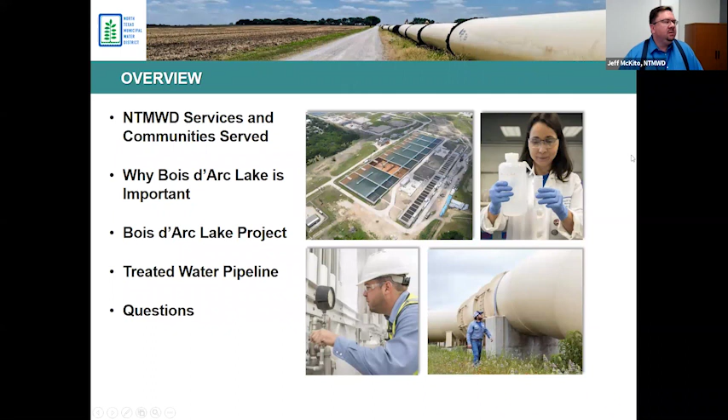So let's talk a little bit about NTMWD and the services that we offer. First of all, we serve up to 80 communities, 75 of those on a daily basis and 5 as needed. That's a service area of about 2,200 square miles in 10 different counties here in North Texas, and 1.8 million people currently receive water from us.

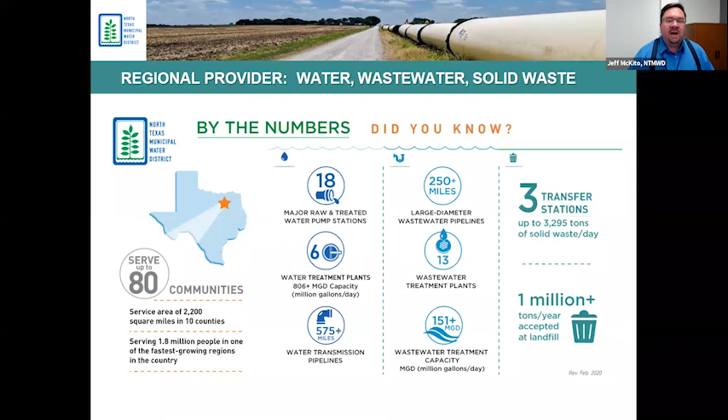But that's not the only service we provide. We also provide wastewater services to 1.3 million people, and we provide solid waste services to about 900,000.

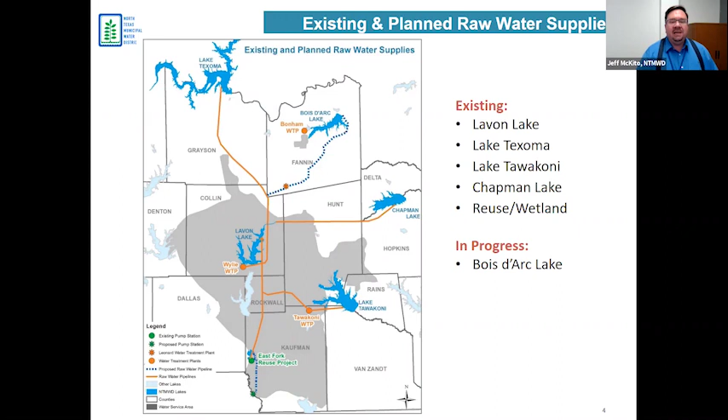So why do we need to build Bois d'Arc Lake? Well, really, it's all about population. When the district began providing water in 1956, we serviced 30,000 people. Today, as I mentioned, 1.8 million, and as you can see by this map, by the year 2070, that number is expected to more than double to 3.7 million people.

Our service area includes some of the fastest growing cities in the country, including Frisco and McKinney. We also service Plano and Allen. The Collin County communities are really growing. In fact, Bois d'Arc Lake will only provide us reliable water until the year 2040, and we will need to find additional sources after that to keep up with the growth in our area.

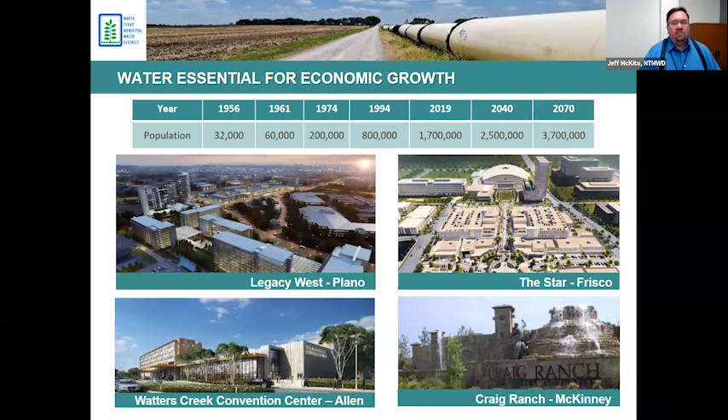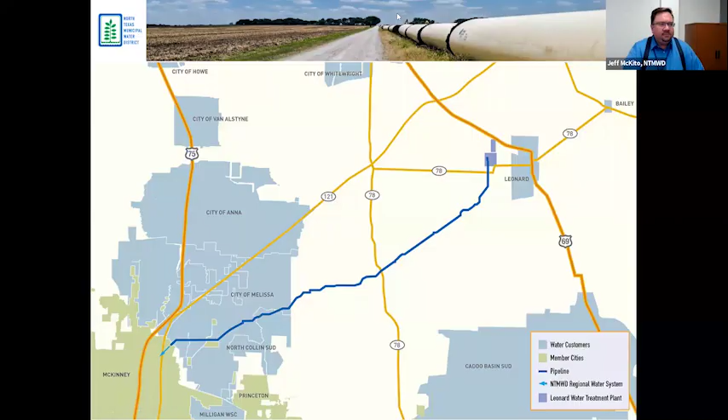So what is Bois d'Arc Lake? It is the first major reservoir that's been constructed in Texas in 30 years, and it's about 16,600 acres. It's got a firm yield of 108 MGD, similar to Lake Lavon, a little bit less, but similar to that. North Texas is the owner and operator.

The cost estimate that you see here, 1.6 billion, is for all of the components that we'll talk about. I know that y'all are here for the treated water pipeline to discuss that, but in this particular case, we're going to go ahead and I'll review the entire program.

Construction began after we received both permits. I'll talk about that in a little bit. It began in 2018. We anticipate starting to impound water in late 2020, with ultimate delivery of treated drinking water to our service area in the spring of 2022.

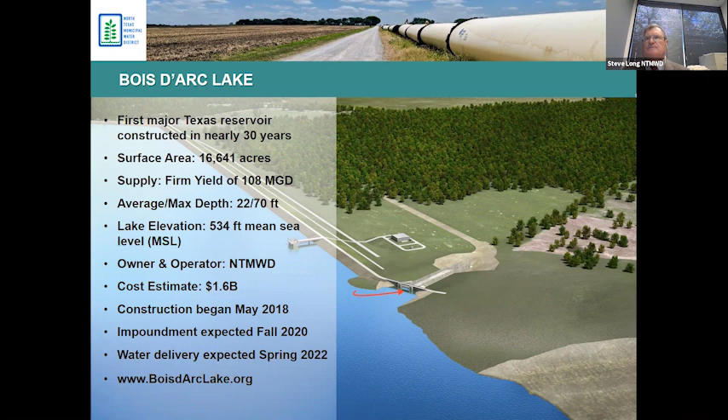Okay, so this is an overview of the project. As you can see, it's a very long project. It starts at the northeast corner of Fannin County and goes all the way to the city of McKinney.

The first area we want to talk about: we organized this project based on work type. We have heavy civil earthwork - that'll be Archer Western doing the dam, reservoir clearing, and the Leonard Terminal Storage Reservoir. We have Resource Environmental Solutions, and they are going to do the mitigation. We purchased a 15,000 acre ranch, Riverby Ranch, and we have some upstream mitigation sites east of Bonham. So Resource Environmental Solutions will be our major contractor for that part of the project.

The next part is the heavy mechanical - that'll be the raw water pump station at the dam, the Leonard Water Treatment Plant, and the Leonard High Service Pump Station. Garney is that major contractor. For the roads and bridges, we contract with Austin Bridge and Road. Garney also will be doing the raw water pipeline and today's topic, the treated water pipeline.

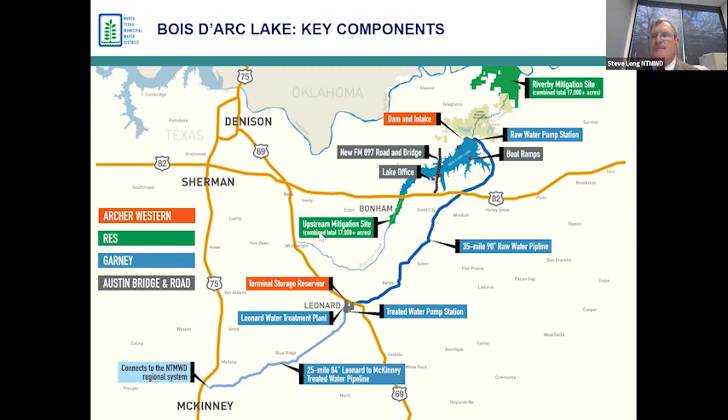So this is a picture of the dam. The dam is approximately 2 miles long. It's called a zoned earthen embankment. What that means is that there are different types of material, different types of earth, that we want to go in different portions of the dam.

The upstream side will be the heavier clay particle - that'll be our impervious layer. The downstream side will have more sand. Finally, we'll also have a sand layer and a sand blanket, and that'll be our drainage system. All of the materials for the dam are available on site with the exception of the sand. About 5.5 million cubic yards of embankment will make up the dam.

It also has a raw water intake structure, raw water pump station, and the service spillway, and we'll get to see more on that in a minute.

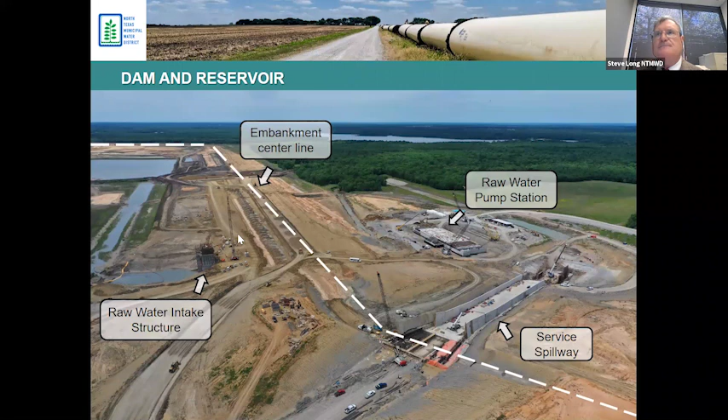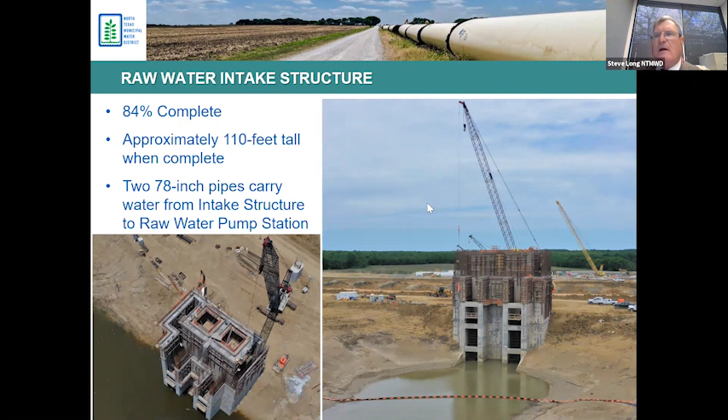This intake can be operated either in parallel or individually. There are gates at multiple levels that allow us to withdraw water for the best water quality at different levels in the lake.

This is the raw water pump station. The raw water pump station is basically two pump stations built side by side. We have two different rooms, and there'll be a total of 9 pumps in each room. It's the size of a football field.

Its initial capacity will have 3 pumps, and that'll be 90 million gallons per day. Now, 90 million gallons per day is almost 70,000 gallons a minute. If you can imagine a 1 gallon water jug, imagine 70,000 passing that in 1 minute - that's a considerable amount of water. It'll be 236 million gallons per day at full build out.

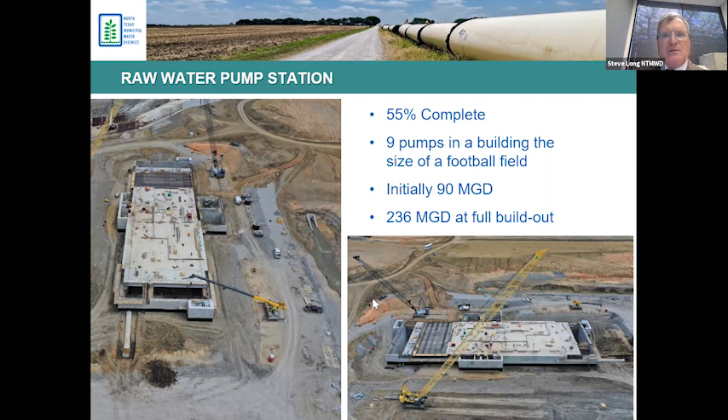One interesting thing is that it's 50 feet deep, and so we are having to use chilled water to actually cool the pump motors.

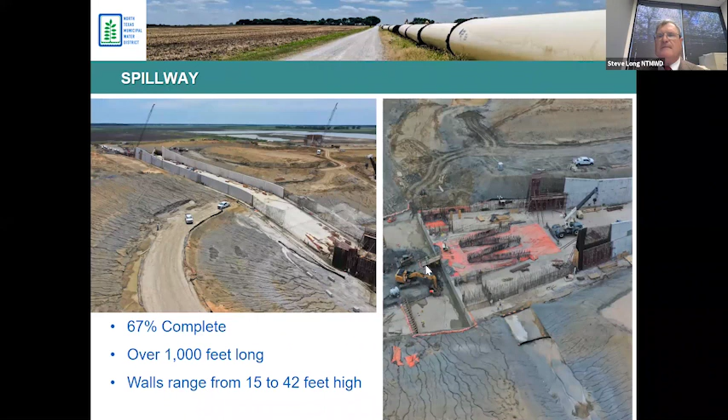Basically, a normal spillway for this size dam would need to be 150 feet long. We were able to do a physical model and were able to reduce that size to 60 feet, and you can see that with the rebar that will ultimately be the labyrinth spillway.

All right, on the mitigation property: RES basically does the design, the build, the operating, the maintaining, and they will ultimately, 20 years from now, turn it over to the Corps of Engineers once the Corps signs off and says yes, the mitigation property is operating like it should. Approximately 17,000 acres, total 5 million trees.

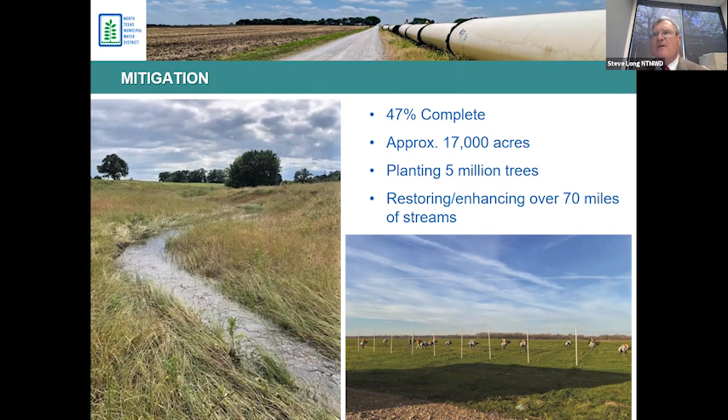Notice the vegetation, notice the curves. We call that sinuosity. Notice that the velocities are not too great and that stream is very stable. That's what we're looking for in a restored stream.

The Leonard Water Treatment Plant will be a 70 million gallon per day treatment plant. It will be a conventional treatment plant, but it'll have a unique, very high level disinfection, state of the art. We'll use ozone to disinfect the water here, so it'll be a very good quality water.

To the north, you'll see the terminal storage reservoir. So we'll have two. The initial one will be 210 million gallons.

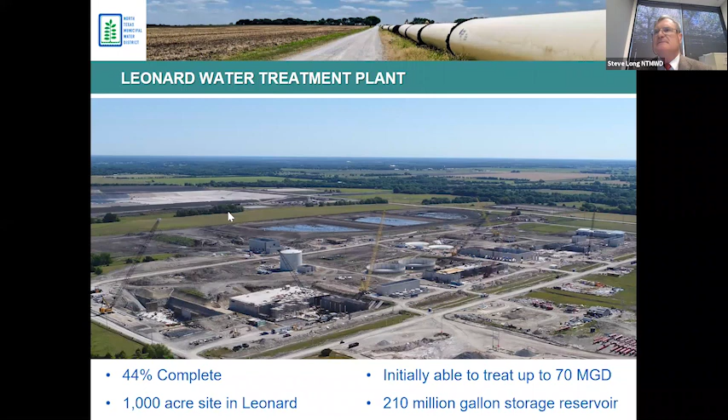This is the FM 897 bridge. It's 1.3 miles long. What is interesting about this bridge is that it was constructed in 2 years. 2 years ago, there was nothing here but trees. So Austin has made a lot of progress on this bridge, 6.2 miles of FM 897, and then other Fannin County roads.

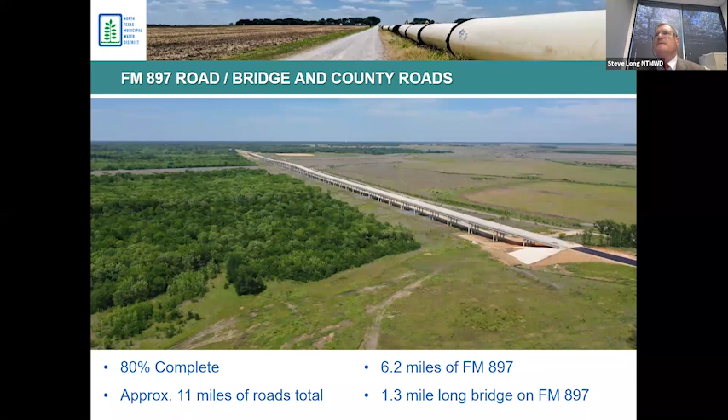We were able to leverage Austin's commercial division to help us as the main contractor for our Lake Operations Center and our Lake Operations Center warehouse. The Lake Operations Center will be the main headquarters operations for the Lake office, and it also contains space for Fannin County Sheriff's Office and the Texas Parks and Wildlife.

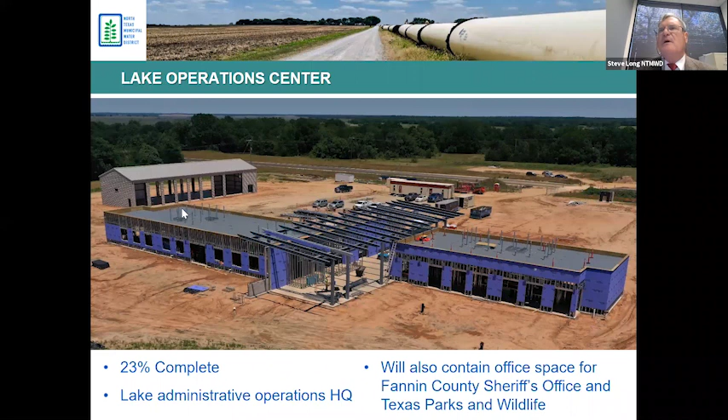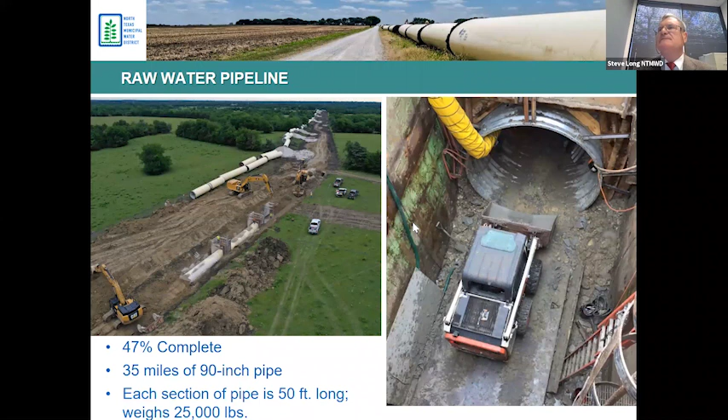Timeline: we received the 2 permits. We had to receive one from the state that allowed us to impound water, and that was received in June of 2015. We had to receive one from the federal government; that was February of 2018. So with both of those permits, we were allowed to start the dam in May of 2018, and the roadway in May of 2018.

As you can see, the roadway has progressed very rapidly. In August, we brought in Resource Environmental Solutions for the mitigation property. In November, we started the Leonard Water Treatment Plant. In December, we started the raw water pump station. In the spring of 2019, the raw water pipeline started. We had started construction on the boat ramps and the recreation areas.

And then this winter, the treated water pipeline will start. So late summer, FM 897 bridge and roadway will be complete, and then later on will be the boat ramps and the recreation areas. Late 2020 will be the dam.

We'll start impounding water. Then we will also bring online the raw water and treated water pump stations and pipelines, and then the Leonard Water Treatment Plant for final delivery in spring of 2022. The environmental work that RES is doing, the mitigation property, will be complete in the spring of 2023.

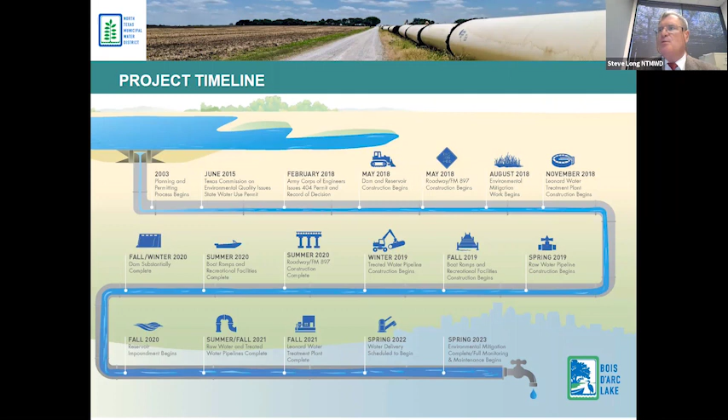And with that, could I turn it back over to Jeff? Steve, thank you very much.

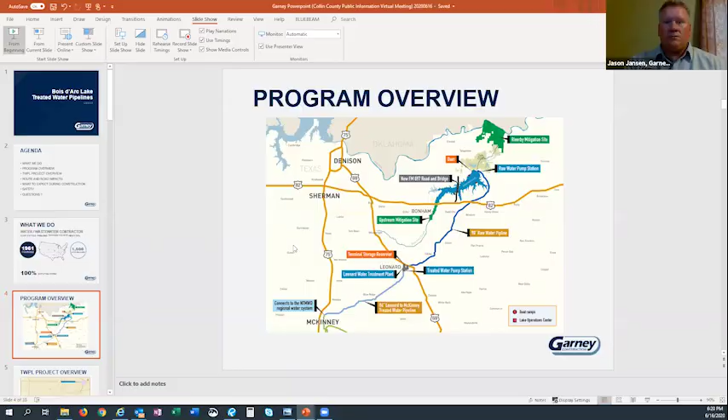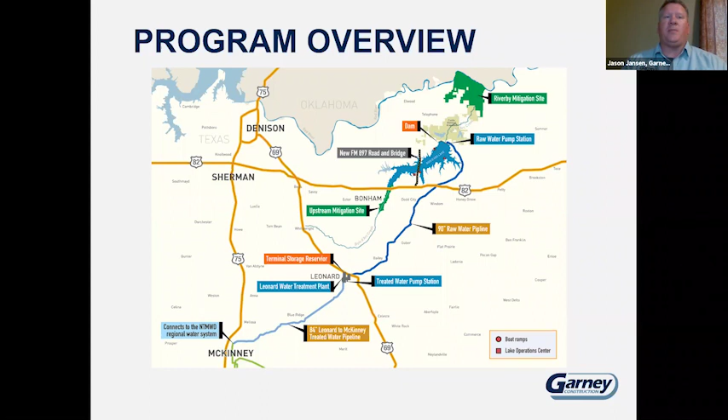So back to the program overview component. Again, we touched on the raw water pipeline and the treated water pipeline. As far as the treated water pipeline project overview, this approximate 25 miles of 84 inch is intended to convey a potable or treated water supply from the newly constructed Leonard Water Treatment Plant facility southwest to McKinney.

To piggyback on some of Mr. Long's fun facts, as Steve had indicated, each pipe segment along this corridor will be 50-foot lay lengths. To break this down into numerics, every single foot of this pipeline will consist of approximately 288 gallons per lineal foot. The entire span, just in residual volume from Leonard to McKinney, will be just over 36 million gallons of water. So it's quite a massive undertaking.

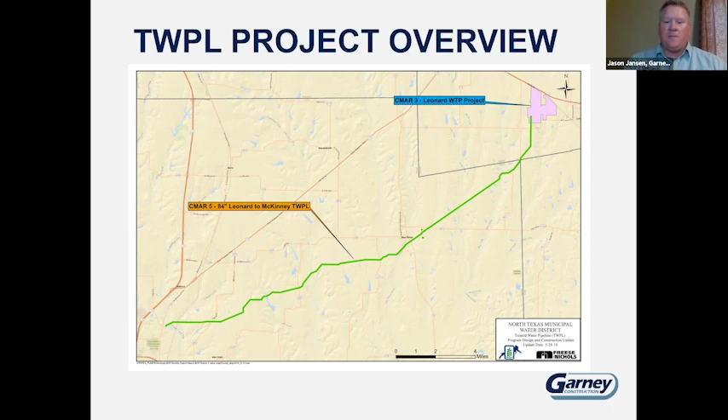To dive into more particulars on the project overview, again, approximately 25 miles of 84-inch. The corridor along this alignment actually touches three counties: Fannin, Hunt, and Collin. Along this pipeline alignment, there's a total of 12 open cut county road crossings, which we'll talk about in more detail later. Also of magnitude, there's 27 separate tunneled crossings for a totality of approximately 1.3 miles.

Also, there will be 7 large diameter inline 84-inch isolation butterfly valves, and what we refer to as pipeline appurtenances. There'll be 47 air release valves intended to expel air during pipeline operations, and then a series of 40 independent blow-off valve structures if during normal operations the pipeline needs to be dewatered for routine inspections, etc.

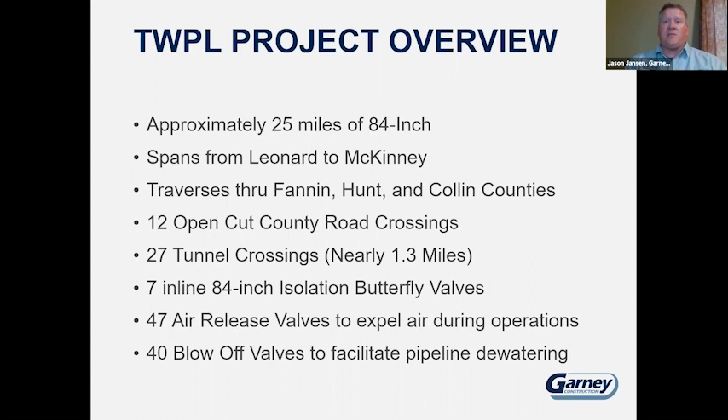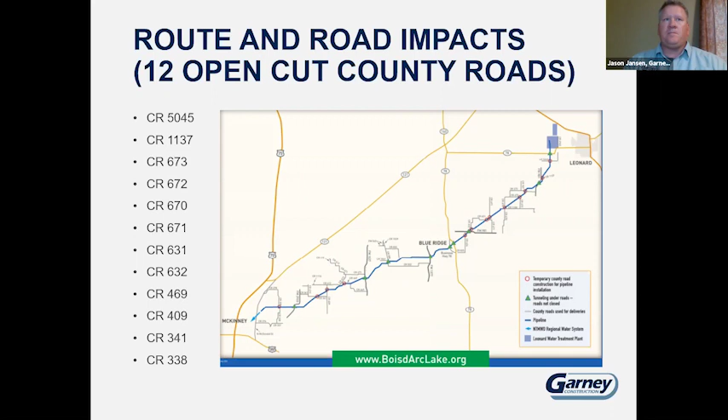For those of you that have already been in direct communication with either myself or Ben Snyder, there's several operations that are ongoing, but I'm going to start at the beginning.

For pre-construction preparations, one of the first things we do to safeguard everyone's interest is to conduct a preliminary road assessment. That's to establish a baseline to see how the roads withstand the delivery traffic.

Secondly, for all property owners' interest, we compile a pre-construction documentation of all your properties, conducted in a series of two attempts. We conduct aerial drone photography as well as ground photo and videography, so if ever throughout the course of construction, we have a series of what it looked like before to match like or equal kind to post-construction.

Also, for the pre-construction preparations, we survey the project site, the limits, the right-of-ways, and the easements.

To begin the necessary preparations to facilitate the construction deliveries, there are a series of roadways that might require some improvements prior to the start of those deliveries.

Also, you'll find that we clear the timber along the right-of-way, and we'll touch into this more later on, but remove vegetation and topsoil, and that's key to the final restoration of your property.

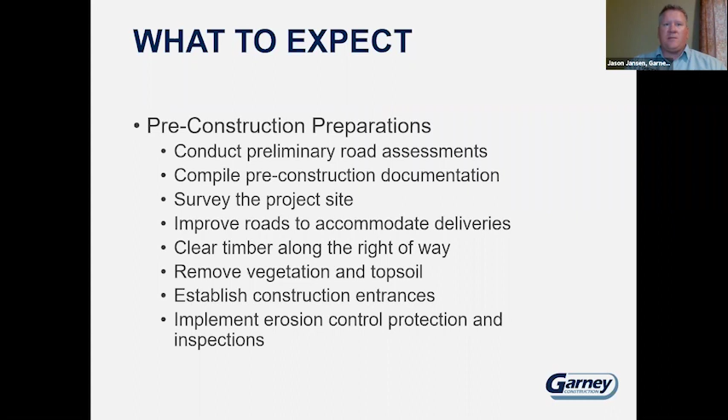Also, at the onset of pre-construction preparations, we'll establish the construction entrances as well as implement erosion control protection and initiate those inspections. A lot of these activities will be ongoing throughout the course of the build, such as erosion control, etc.

Some of the larger impact work items leading into the start of the pipe installation, you might see we will initiate the tunnel crossings. One might ask, why do you do that? The reason is the tunnel constructions are typically a longer lead work item, so the intent to get them out early is to avoid delays once the pipe installation crews mobilize on site.

So, to maintain the stringent schedule, and furthermore, having those tunnels constructed mitigates against any congestion that might be incurred during the construction delivery phase.

In the opening slide I'd indicated, but it's a focal point, the stripping and stockpiling of topsoil. Again, this is necessary to safeguard your existing topsoil to help facilitate final property restoration, as well as the construction of material delivery entrances to facilitate those.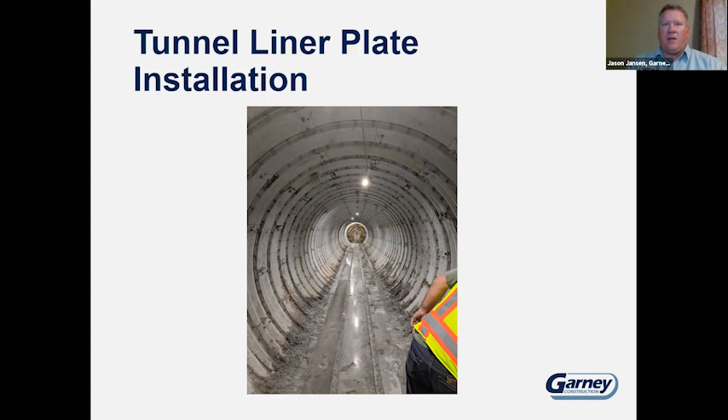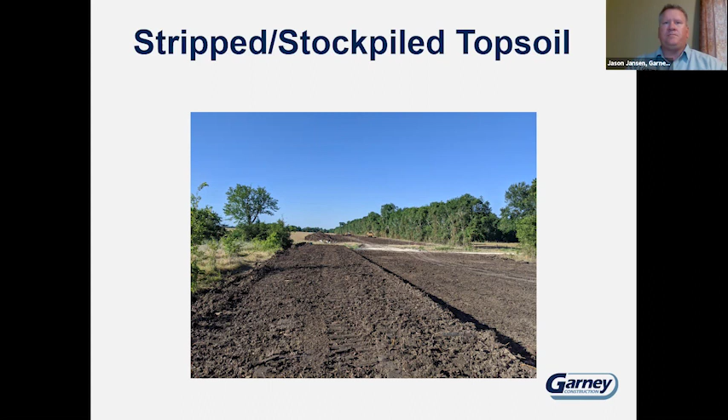So what else to expect? Preparations for pipe installation, staging of the materials. The start of pipe deliveries is targeting June 29th, and we'll begin stringing and staging of the 84-inch welded steel pipeline.

Precast structures, import pipeline embedments, valves, small diameter piping, miscellaneous construction equipment, etc. The general approach is we're working from north to south, originating at the Leonard Water Treatment Plant and moving our way southward down the alignment corridor.

Outside of that, general items, portable facilities such as dumpsters, fuel tanks, etc.

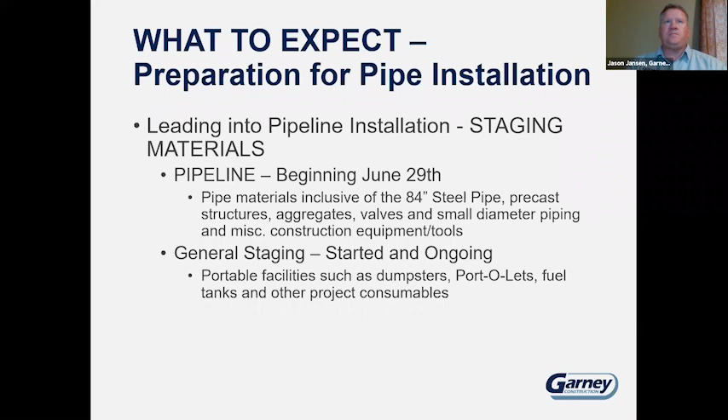You can see there is a lot of material that will quickly be consumed once we initiate construction.

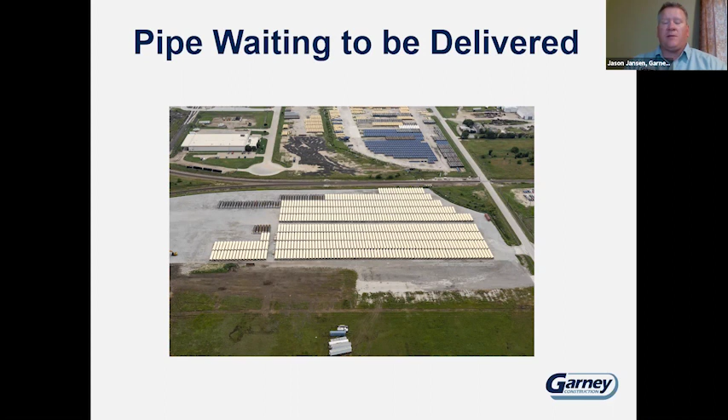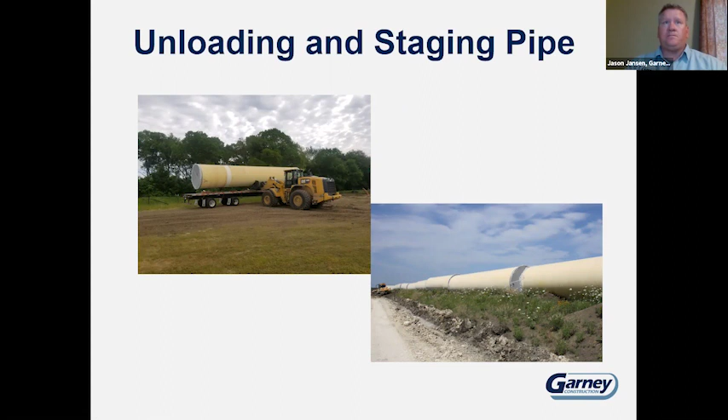Also, concurrent with started deliveries or shortly trailing behind, we'll begin the stockpiling of aggregate along the construction right-of-way. To share some other numbers with you, with every stick of pipe being 50 feet and approximately 2 tons per foot, there's going to be tens of thousands of semi-loads of material just to stage for raw construction materials.

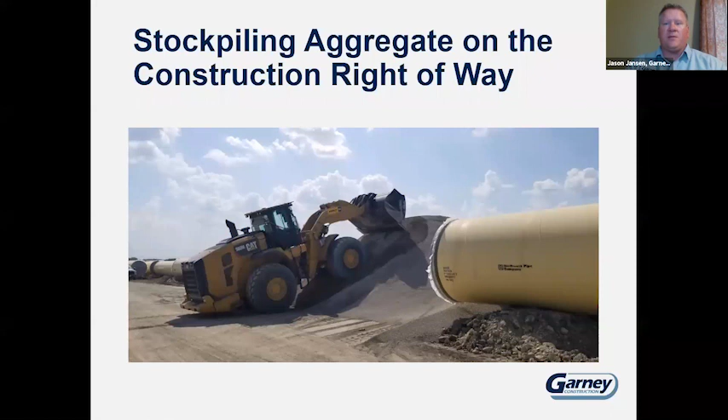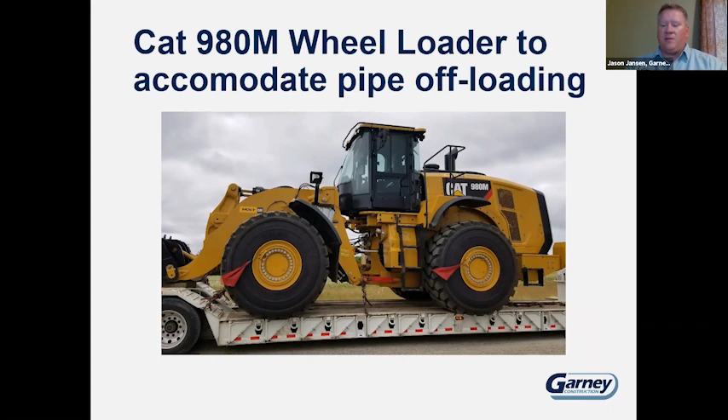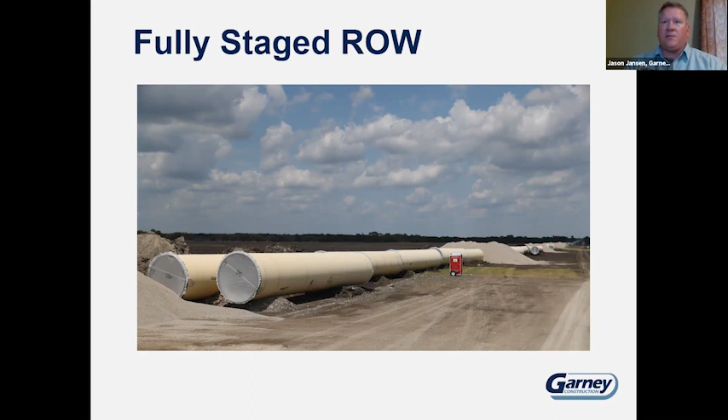So from a pipe installation, what to expect? As I indicated before, crews will be working from north to south. There will be multiple lay headings and crews throughout the project working simultaneously, whether it be excavators, front-end loaders, dozers, off-road haul trucks, etc.

It's important to take note that Garney or our subcontractors will be traversing along the construction easement throughout the project duration until final completion. As others have heard me allude to before, we call this a series of waves: the pre-preparation wave, the staging wave, the installation wave, the commissioning wave, and the restoration wave. Happy to cover more particulars with you in person related to your respective properties.

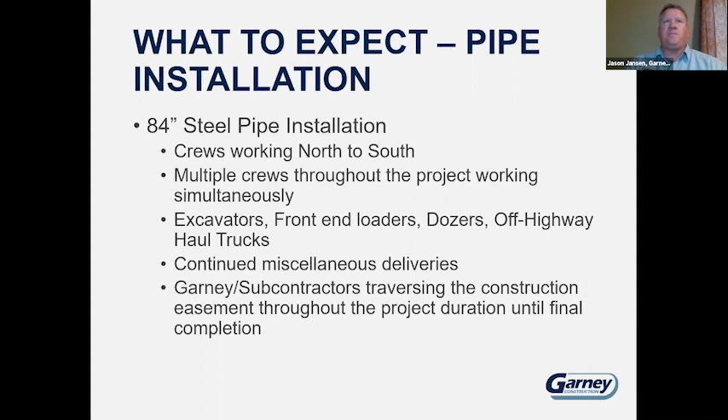Here's a series of photos from a pipeline installation. This is some hard rock that was incurred up on the raw water pipeline segment. We do foresee a lot of this to be incurred throughout the course of the treated build, throughout sections just south of Leonard, and then predominantly up north of McKinney.

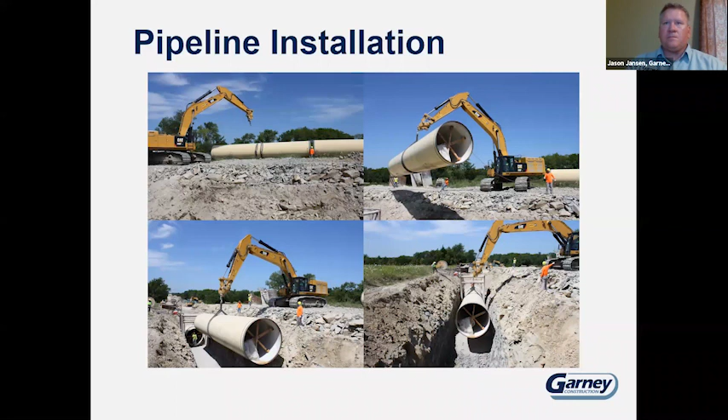Here's a couple of photos depicting a threading of the carrier pipe. This is the pipe that inserts through the previously constructed tunnels, the tunnel liner plate systems.

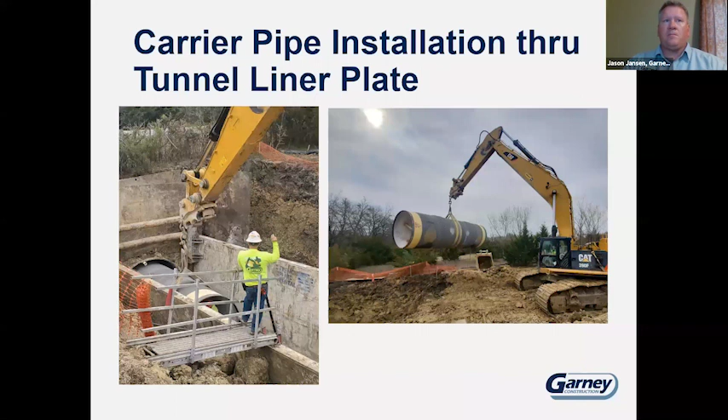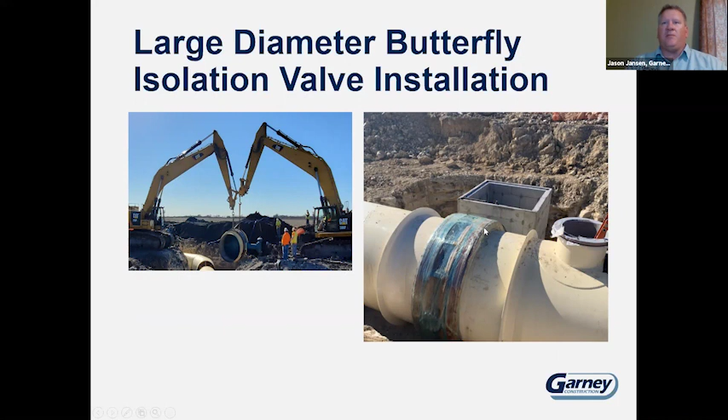As indicated in one of the earlier slides, we have a series of 7 large diameter isolation butterfly valves. These are quite heavy. In this picture, we have 2 Cat 390 excavators side setting this pipe in its final resting position. And here's an example of what it looks like before we finalize the backfill.

So post-pipe installation, what to expect? Again, the filling, testing, commissioning. There's a tremendous amount of water just to get the pipeline full.

And post that will be the surface restoration. The intent of that is to replace the topsoil previously removed during phase 1, as well as removal of the excess materials and dirt.

It's a great opportunity, with Garney being the construction manager and CMAR, to create a true win-win scenario for all impacted property owners. There will be available excess materials that we can further discuss. Also in the latter phases will be restoration of the permanent fencing and gates, restoration of the creek banks, and placement of excess dirt.

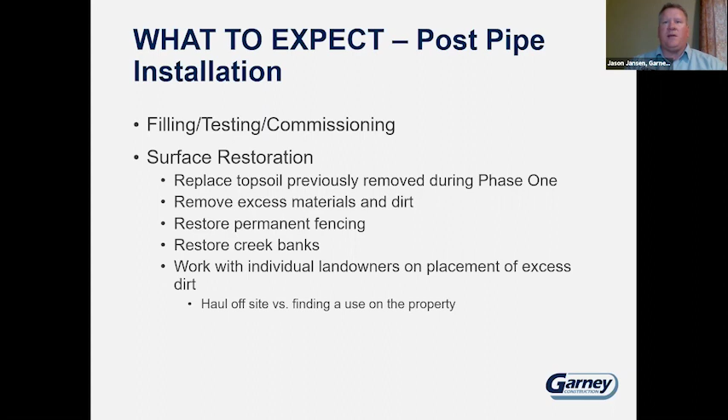This photo depicts what's referred to as concrete articulated block, used on some of the steeper creek banks to mitigate against erosion and scouring. This will be a final protective measure put in place to shield those banks.

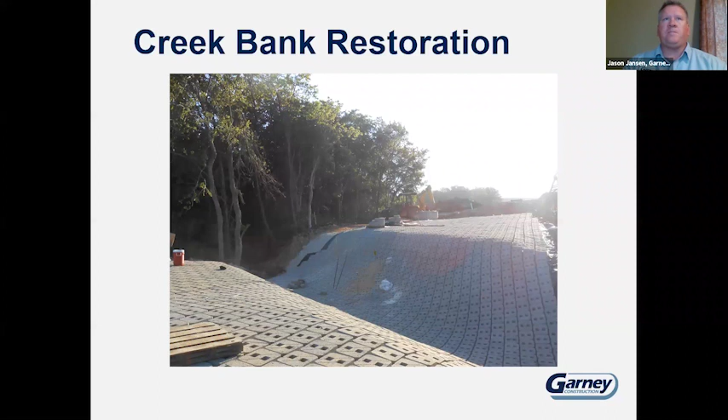Public safety - as that opened, projects of this magnitude come with some scale of impact. There's going to be a much elevated level of traffic volume. It's important to note that this is an active construction site. The work is in proximity to residential homes. It takes very large and heavy equipment to construct a project of this magnitude.

There'll be open trench excavations to contend with, a host of material stockpiles that are very inviting for young children to want to climb on. We would encourage everyone to refrain from allowing their children to access the right-of-way and to be accompanied by an adult at all times.

We went to great lengths to work through with the respective county commissioners to assign designated haul routes to accommodate the construction deliveries. We have pre-coordinated the open cut roadways.

We would ask that every property owner and everybody within the public be mindful of the traffic control signs that you will see implemented and in place. Those signs are critical to ensure the safeguard and protection not only of yourselves, but also our workers.

We'll ask for strict adherence to posted speed limits, and throughout the course of construction, if you encounter construction traffic that's not obeying the speed limits, you will have immediate points of contact with the Garney organization to assist in getting that rectified. Also from a public safety standpoint, we'll be working in close proximity to existing utilities, whether it be overhead electric, gas, water, etc.

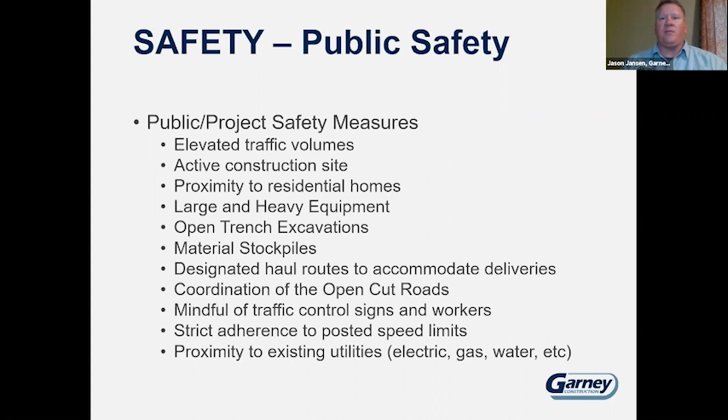From a continuance of the public project safety measures, what can we do to help facilitate safety? At the close of every shift, it's security of open excavations with safety fence, proper storage of our equipment, continued mitigation of environmental concerns, erosion control.

One thing that Garney does is we maintain new equipment with the current technologies. We also employ trained and certified operators. All work activities are performed in strict accordance with OSHA and safety policy.

And probably of the utmost importance is to ensure that all impacted property owners are well educated and well informed of the at-risk nature of this work, and to remain in proactive communication throughout the course of this build.

Here's a couple of photos of a couple of those new, shiny, well-maintained excavators, and the operators are very pleased to take delivery. This will be the size of the equipment necessary to construct the 84-inch pipeline.

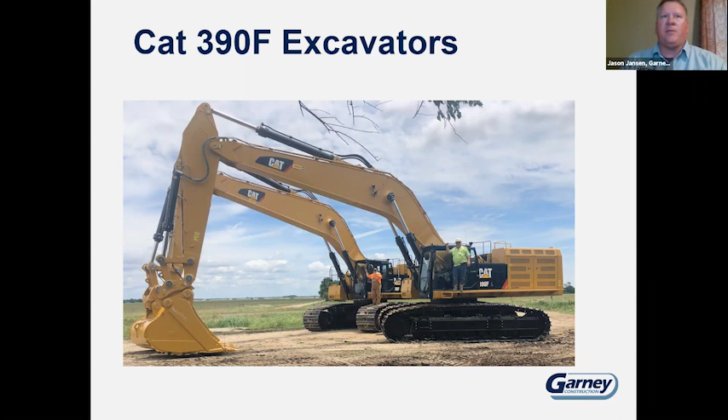Last but not least, just Q&A. For those that have already been in communication with Ben Snyder, he is my point of contact, assistant construction manager and project manager over the treated water pipelines component. And then again, myself, Jason Jansen. Thanks for everybody's time.